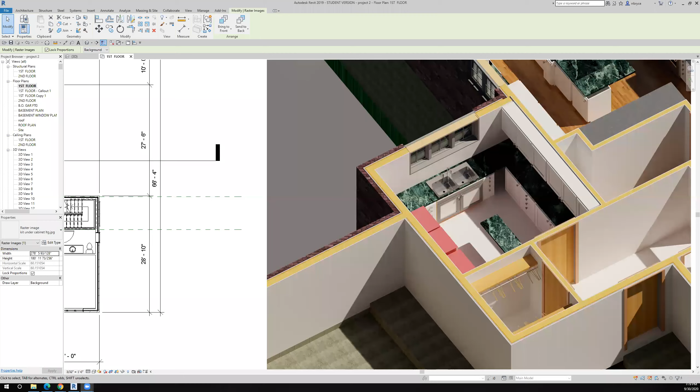Looking at the laundry room, I put the upper cabinets in without doing a tutorial on that because I think we've had enough upper cabinet tutorials. But what I like about the 3D view in this rendering is I can see that I know I need to go back and change the materials on my cabinets, and that'll happen eventually.

And then I'm looking at the 3D, and it's showing me the things that I still need to do. I have a gap here, so I need to make these cabinets wider. And my island floats, so that's not going to work. I need to put some sort of cabinet or cabinets underneath that to hold that island.

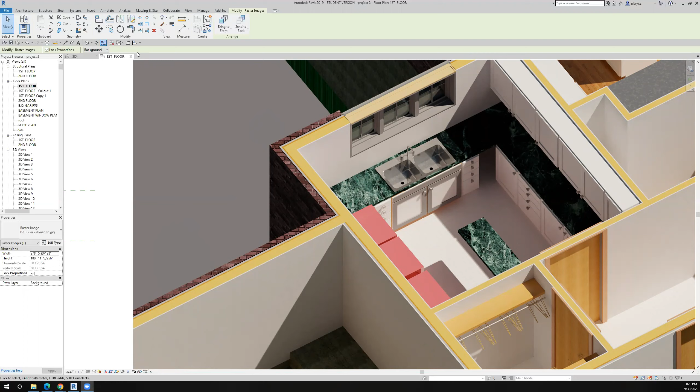So I'm going to go to the first floor plan. I'm going to go over here and I can see, first of all, there's the cabinet. I can look at it in this view, so I'll go to this view, and I can see that I need to make it a little bit wider. How much space do I have there?

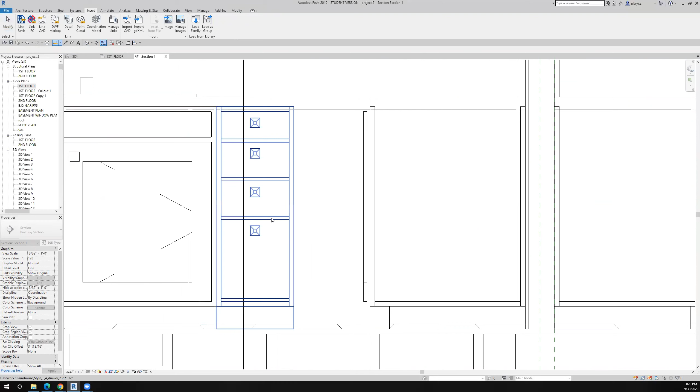From here, I got 1'10", so it's going to be a 1'9" cabinet if we're going to use standard dimensions. And then I'll just drag it over a little bit and then align it. So there'll be a filler in there, which is fine. So I've taken care of that cabinet.

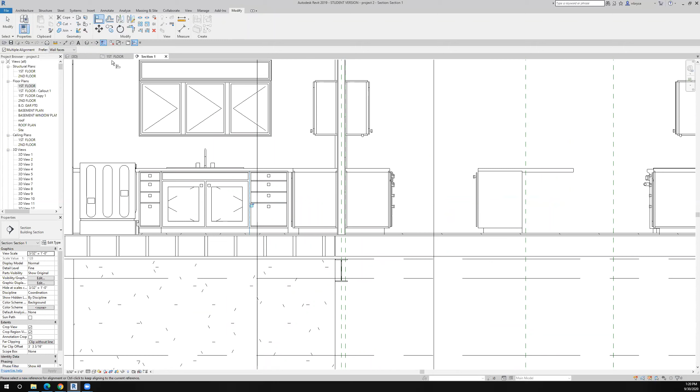If I go back to my first floor plan, I know I need something to hold the island up. I need some cabinets to hold the island up. So what do I want to do there?

Well, I'm thinking that maybe it might be nice to sit there while you're doing your folding. So I'm gonna put some very narrow drawers on both sides, which will hold up the island, and then leave a space in the middle. So if somebody wants to actually put a chair here, then they could actually sit down and do their folding. And if they didn't want to do that, they could use that space for baskets or something like that, which would work too.

So let's take this guy. I think he's a drawer, and we're going to pull him over here. And I need to flip it. So let's grab this guy and pull him over here. Now he's definitely too deep.

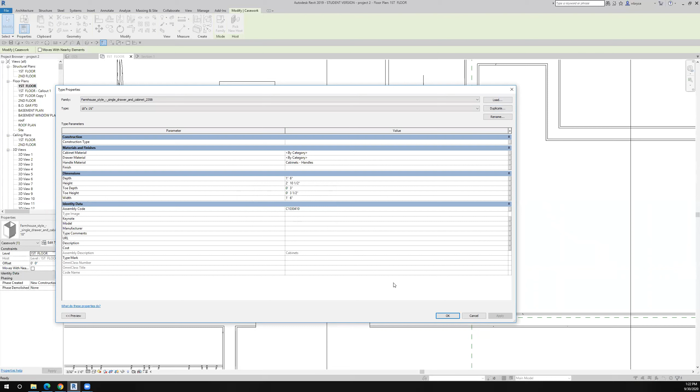And normally we change the width, but this time we're going to change the depth. So we're going to make that 1'6" deep, and let's see what happens there. So now it gets smaller. And maybe it should be a little smaller than that even, huh? What do we have here?

1'5½". Well, I guess I'll leave it like that for now. But I don't want it to be that wide either, because I want to have some space underneath there.

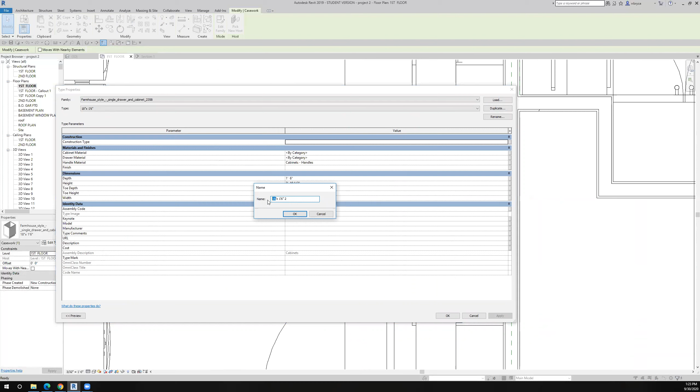So edit the type, duplicate it, and instead of being 18 inches, I'm going to make it 12 inches. And we'll get rid of the 2. And instead of being 1'6", we'll make it a foot. Okay, so that made it narrower.

And let's flip this section view so that it goes in the other direction, just to look at what we have here. And it's a little difficult to tell what's going on, so I'm going to go back to the first floor. Oh, I didn't flip it. Flip the section. Okay, that looks good. Go to view. Now I can see what I did.

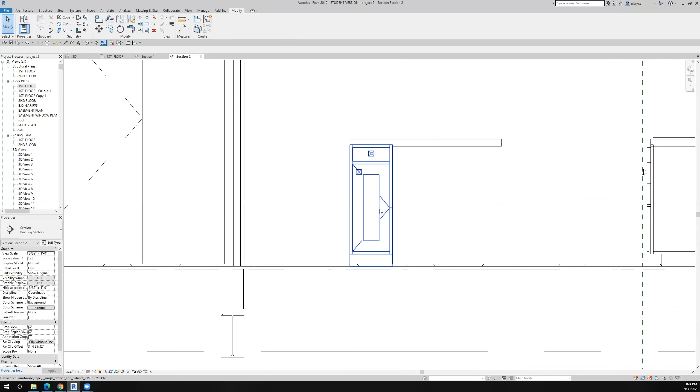I'm going to align this guy with the edge of here. And let's see if we can mirror that about the midpoint of the countertop. I'm not sure that that'll work or not. No, it didn't. Okay, so we'll do it this way, and this will pick a midpoint, and I'll draw my imaginary line.

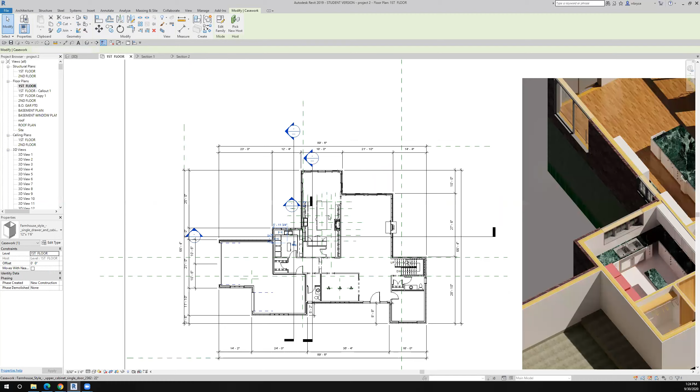And both of the hinges are in the wrong location, because if I'm sitting here, I want to be able to open it and be able to reach inside of it. So we'll go back to the first floor, and we'll go down, and I want to flip this guy this way, and I want to flip this guy this way.

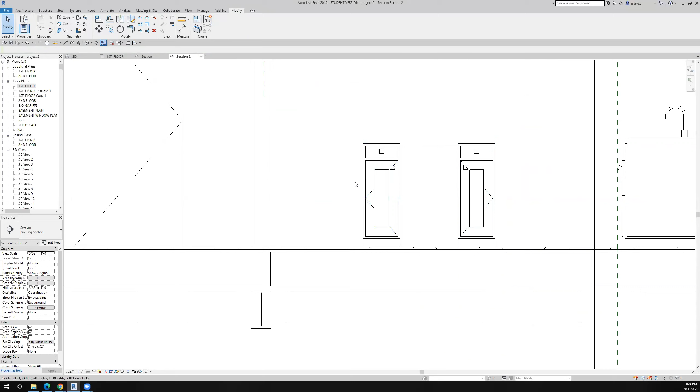So if we go back to that section, now you can see that it makes sense. If I'm sitting here, I can reach down and I can open this up and it'll pivot about this hinge point. So that makes more sense to me.

So let's go back to the first floor plan. I know that there's a lot of material on the cabinets that are not right, so I'm going to have to change all of those. But we're just working around. So what's the distance now from this opening to this opening? And it's only 18 inches.

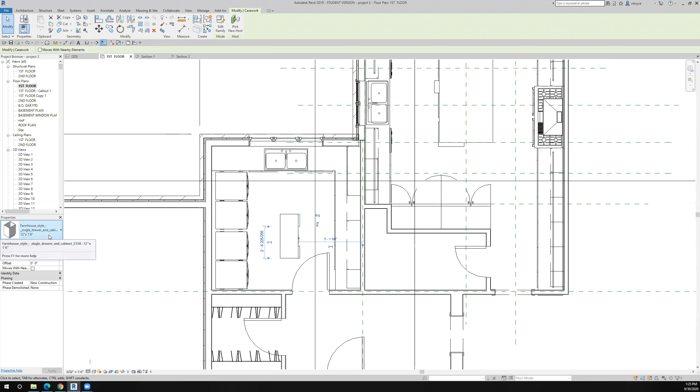So I'm going to go back and change this guy. It's 12 inches is fine. It's 12 inches wide, that's enough. 18 inches is a little tight. I think that'll work, but I'm not sure. Maybe I should make these 9 inches just to be safe.

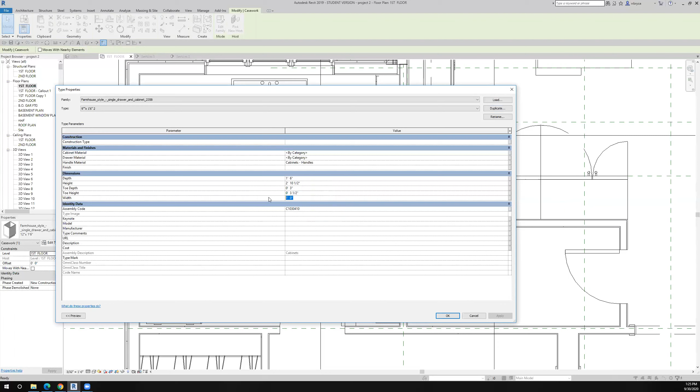So I'm going to edit this type. I'm going to duplicate it. And instead of being 12 inches by 1 foot 6 deep, I'm going to make it 9 inches by 1 foot 6 deep. So my width is going to be 9 inches. So I just want to make sure that there's more space in there. And then I'm just going to say match properties. Boom, they're both the same.

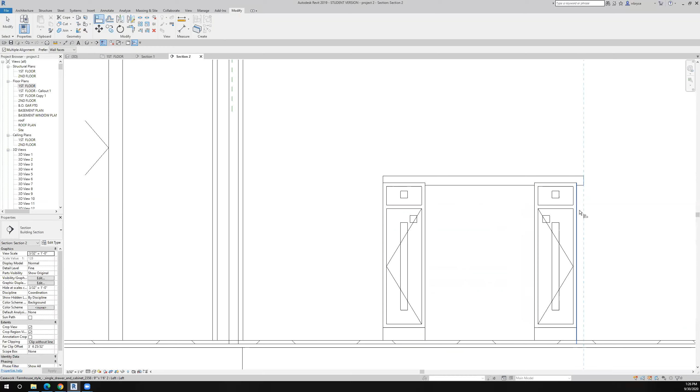Back to that section, because now I need to realign that. And the lesson I hope is being understood over and over again here is that we don't necessarily get it right the first time. You know, we have to go back in and make some modifications and fine tuning. And I'm always looking at my project and I'm saying, well, what could I do to make it better? And yeah, it might be a little bit more work, but you know, in the end, we want this to be right.

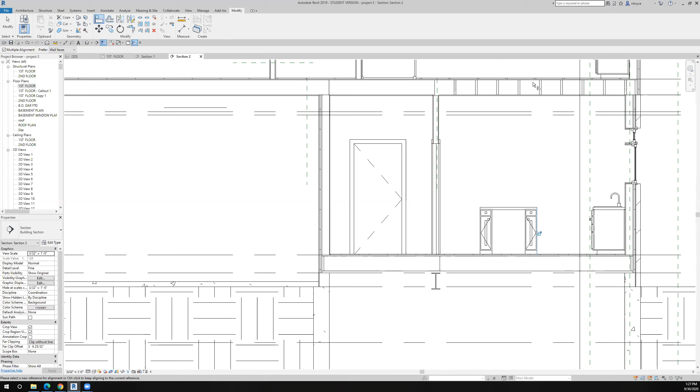And so I think that'll work as an island. If someone chooses to sit here and do their folding, that would work. So I think we're done with the laundry room now as far as cabinets go. And we'll stop it here.